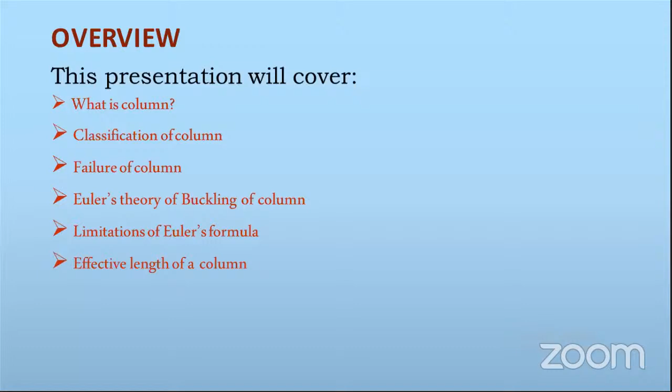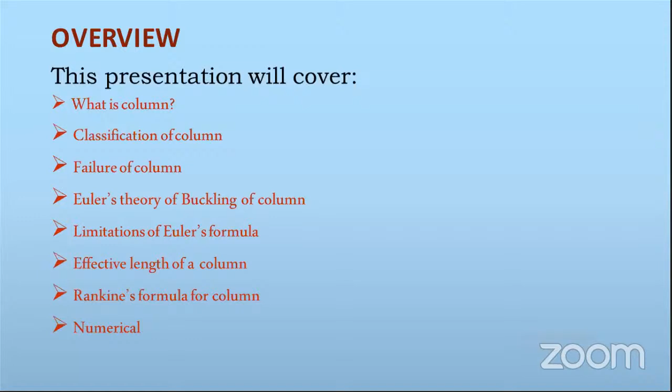Next, limitations of Euler's formula - whatever formula is given by Euler, there are a few limitations that we will discuss. Next, effective length of column, that means end conditions of column are to be studied properly before studying any type of formula. Next, Rankine's formula - after covering the limitations of Euler's formula, we will discuss Rankine's formula for column. And lastly, we will cover one or two numericals for Euler's formula as well as Rankine's formula.

So let's start with the topic. Firstly, dear students, what do you mean by column? Many of you are familiar with this term. I think all of you are from civil engineering, so you are familiar with the word column. Column is nothing but a vertical member of your frame structure.

Basically, two types of structures are there: first, load bearing structure, second, frame structure. In case of frame structure, we construct columns. Column is a truly vertical member which will take load from the slab and transfer that load to the foundation or subsoil. That is the work of column.

Now, with respect to column, we have two different terms: first is column and second is strut. Column is a truly vertical member which takes load, but strut can be inclined as well as vertical. Basically, the word strut is applicable in case of truss - that is the most suitable word you should use.

So in short, you can remember column is a vertical member of frame structure which has the function of transmitting load from the slab to the foundation.

Now an important term to be discussed under this is slenderness ratio. Why discuss this slenderness ratio term? Because slenderness, as the name suggests, is the term related to the size and shape of column. If your column is slender, according to IS 800 2007, basically 4 classifications are there: slender, compact, semi-compact, and plastic. But as per IS 800 2007, as well as practicability, slender sections are always neglected.

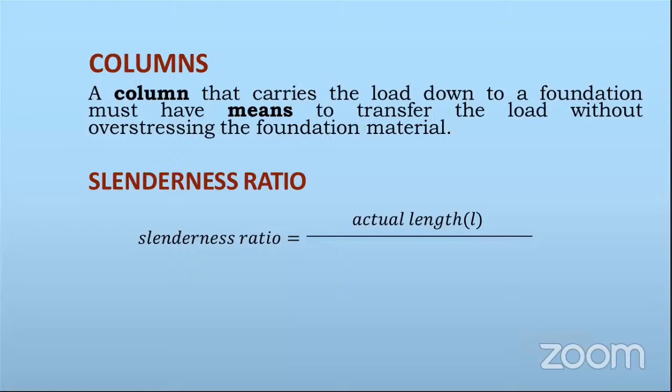It is denoted by lambda. It is a ratio of actual length of column to the least radius of gyration. Now, actual length of column - what is that? It is nothing but the distance from your slab to the other floor present at floor level. That is your actual length of column. In other words, you can call it height of column as well.

Second, least radius of gyration. What is radius of gyration? It is nothing but the distance of your point of application with respect to the axis of rotation. We will discuss radius of gyration in detail in the next few slides. So from these two slides, you have to remember what is column and what is the importance of slenderness ratio - it is lambda, that is L upon least radius of gyration.

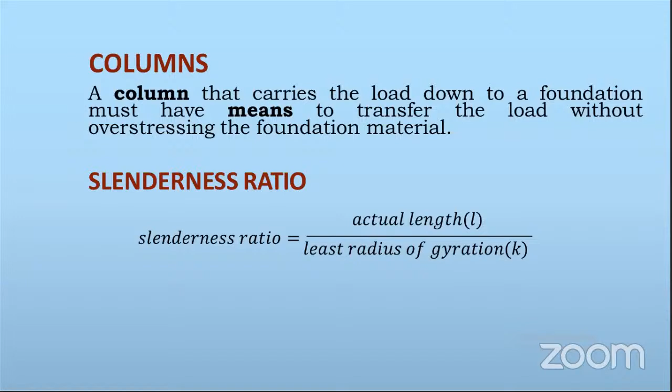Now, column - in this image you can observe a frame structure, and whatever is highlighted in red shade, that is your column. Column is nothing but a member which takes load from the slab and transmits that load ultimately to the footing. That is called column.

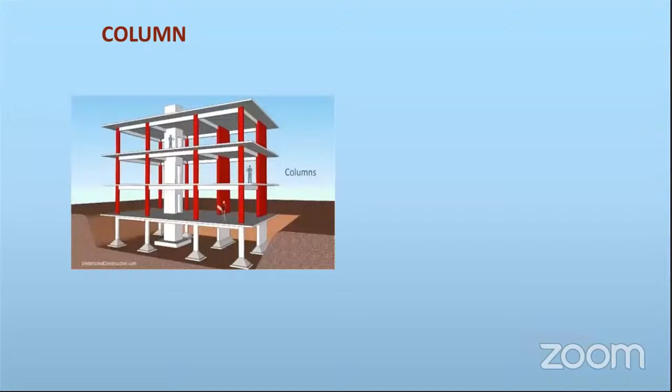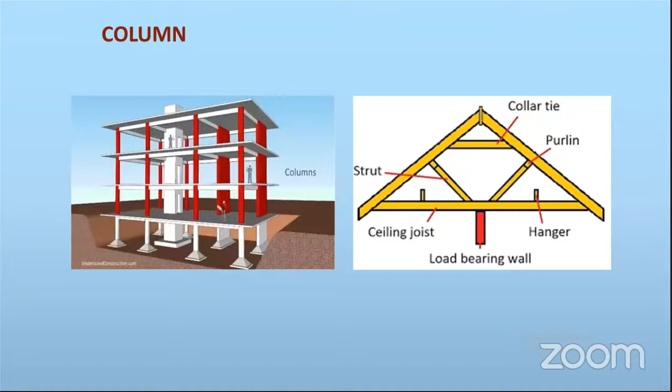Secondly, strut. Column is always a truly vertical member - only vertical members are called columns. What type of load does a column carry? That is axial compression load. But in case of strut, it is again a member under compression, but it can be inclined as well. So in the second image, you can observe strut is an inclined member shown in a truss. That is another classification under axial compression member.

Now, how to classify these columns? Basically, we discussed what is slenderness ratio - it is nothing but actual length with respect to least radius of gyration. Now, if your slenderness ratio is less than 32, that type of column is called short column. Do remember, this term is important whenever you study regarding Euler's theory as well as Rankine's theory. Second one is medium column.

If your slenderness ratio value is in between 33 to 120, it is called medium column. And third one is long column, where the slenderness ratio value is more than 120. So this is the classification of column based on slenderness ratio. Now, slenderness ratio depends on two basic parameters: first is length of column, and second is radius of gyration.

Now, in the diagram or image, you can see the first one is tall column, which gets failed because of buckling. While the second one is short column, which gets failed and has attraction towards more horizontal force. So in the diagram, you can see short column as well as long column. In short, you can remember long columns have their length dimension more as compared to cross-sectional dimension. That is your long column.

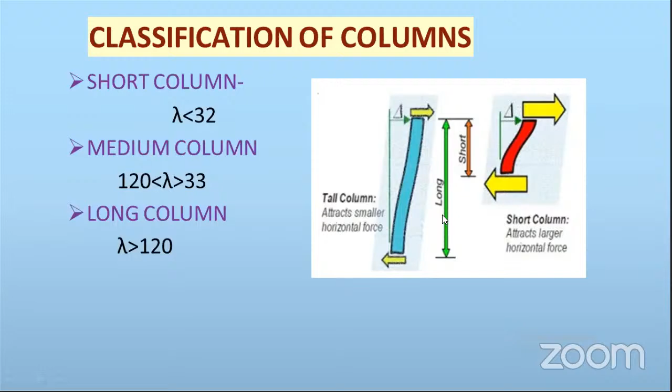Now, how is a column going to get failed? Basically, column failure is the most important criteria before studying anything regarding column. How is it going to fail? Any design with respect to civil engineering is concerned with firstly checking out its failure, and to avoid that failure, we have provisions. Now, to study Euler's theory as well as Rankine's theory, firstly we have to discuss failures of column. What are the failures of column?

First one is direct compressive stress. Second one is buckling stress. And third one is combined direct compressive and buckling stress. That means because of these three stresses, three types of failure occur. First, direct compressive stress - that means in case of short column, it gets failed directly. How does it fail? For that, I will show you an image or GIF where you will come to know regarding compression failure. Imagine any short column is there and load is applied continuously - because of gradually applied load, it will get crushed.

That is nothing but failure due to direct compressive stress. Second, buckling stress. In this case, your length dimension is more compared to the other two dimensions. Because of loading, there is a possibility that the length dimension is going to change its position from its original axis, and therefore buckling is possible because of buckling stresses.

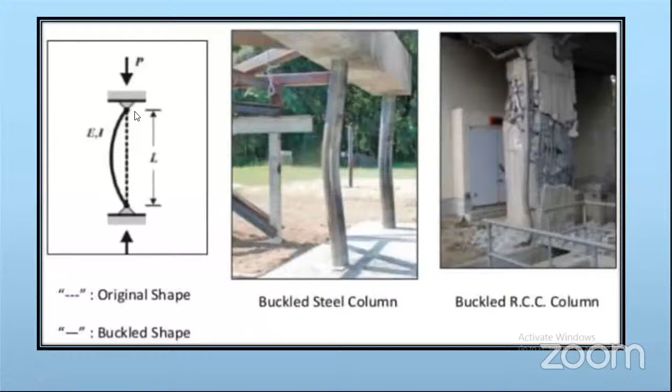Now, failure of short column - how is this short column going to fail? For example, everyone knows what stress is. Stress is nothing but force per unit area. Many times we humans are under stress, that means load is more - as per our capacity, load is getting more, ultimately it is having stress.

So in case of material, stress is nothing but load per unit cross-sectional area. If your cross-sectional area is not capable of taking that load, at that time failure will occur, and that is nothing but failure due to crushing or compression. So sigma, or small p, is equal to P upon A, where P is the load applied on the column and A is the cross-sectional area. So you will get sigma equals P upon A.

Now next, sigma is again to be defined in terms of PC upon A, where PC is crushing load, sigma C is crushing stress, and A is area of cross-section. So in case of short column, there is a lot of chance where your failure is due to crushing.

So sigma C is equal to PC upon A is the important term to remember in case of studying short column. Now, first type of theory that we are going to study is Euler's theory. Euler derived one of the empirical formulas for buckling of column. Euler considered different assumptions, and because of these assumptions, he derived this empirical formula. So before going for the formula, it is necessary to study the assumptions.

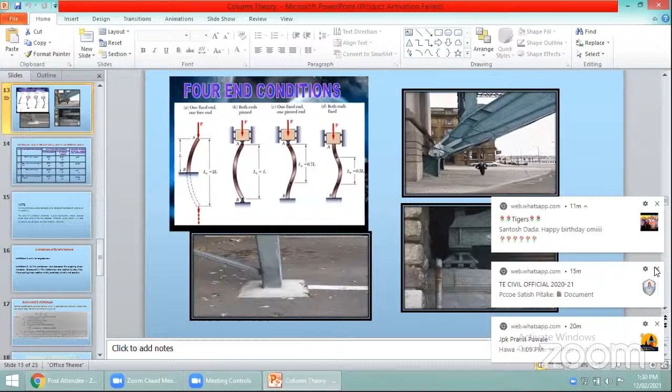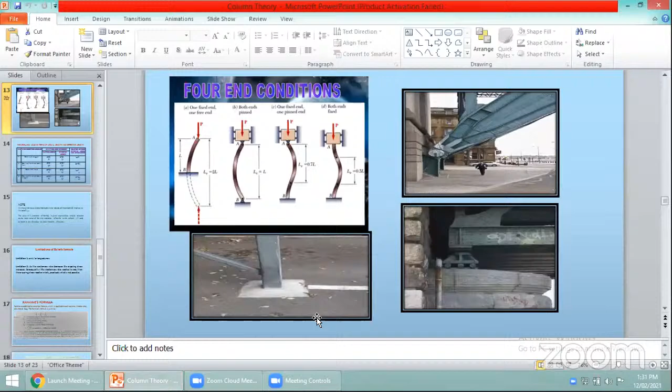Your screen is stopped, please reshare your screen, sir. Madam, please allow me to share my screen. Yes, done now sir. Sorry for the interruption, it might be because of a network issue or something; it was disconnected. So we will start again from the last slide.

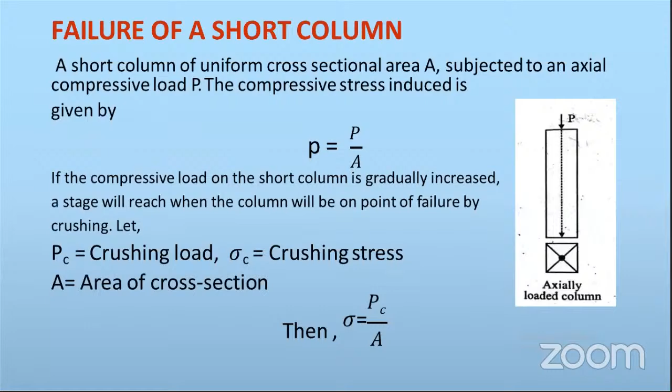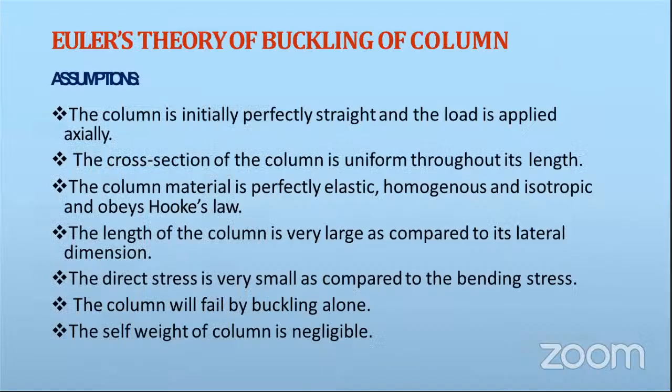So till now we considered these failure modes, these images we have covered, and Euler's assumptions we were discussing. Effective length we discussed, and before that, effective length we have already discussed.

According to the different end conditions, your length is going to get varied. Now that length is to be considered whenever we have to consider the slenderness ratio. According to Euler's formula, crippling load is there for any type of end condition.

It is nothing but pi square EI upon L effective square, where pi is a constant whose value is 3.14 or 22 by 7. E is Young's modulus, or modulus of elasticity. For example, for steel it is 2 into 10 raised to 5 megapascals or 200 GPa. That value is given. I is moment of inertia.

This moment of inertia value is either given or we have to calculate it. In case of a rectangular beam, moment of inertia is BD cube by 12. For a circular section, it is pi by 64 into d raised to 4. In case of numerical problems, we will see that.

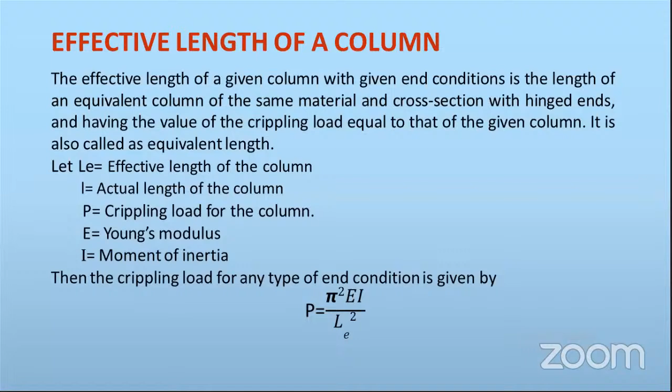Next one is L effective square, that is the effective length of the column. For example, if a column with 5-meter length is given and end conditions are mentioned, we have to go for calculation of effective length.

So next, this is your hinge support, an example for hinge support. Here you can see roller support, and here you can see fixed support. These are the 4 end conditions that we are going to discuss.

In the first case, one end is fixed and the other end is truly free. For example, you can say lighting poles which are there on the roadside. That is an example for one end fixed, where effective length is to be considered as 2L. You can see this buckle shape. L is the original length of the column, and the buckled length L effective is equal to 2L.

Now, second condition, where both ends are pinned, meaning hinge is provided at both ends. At that time, L effective is to be considered as the original length of the column; L effective is equal to L.

Now, third condition, when one end is fixed and the other end is hinged.

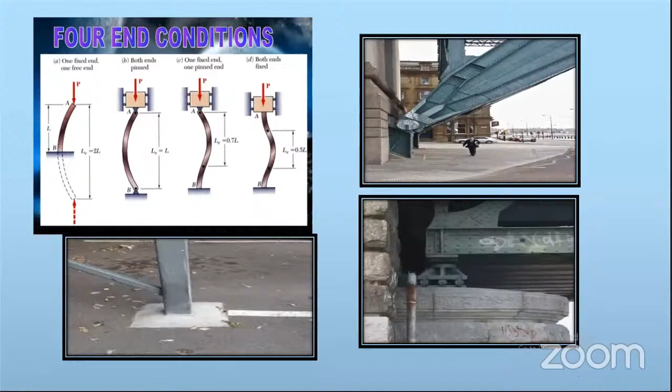That is the both-end-fixed condition where L effective is equal to 0.5 L, that is L by 2. So these are the four end conditions, and I have already shown you different types of supports. Euler's formula is going to be modified according to these effective lengths.

We already discussed Euler's formula: it is pi square EI upon L effective square. So when both ends are hinged, L effective is equal to L, and pi square EI upon L square is the formula applicable when both ends are hinged.

Second, when one end is fixed and other end is free, or you may call it cantilevered, effective length is equal to 2 times the length of the column, that is LE is equal to 2L. Third condition, when both ends are fixed, LE is equal to L by 2, effective length is half the length. So by putting that, your modified formula is 4 pi square EI upon L square.

So this is Euler's formula when both ends are fixed: 4 pi square EI upon L square. When one end is fixed and other is free, Euler's formula is pi square EI upon 4L square.

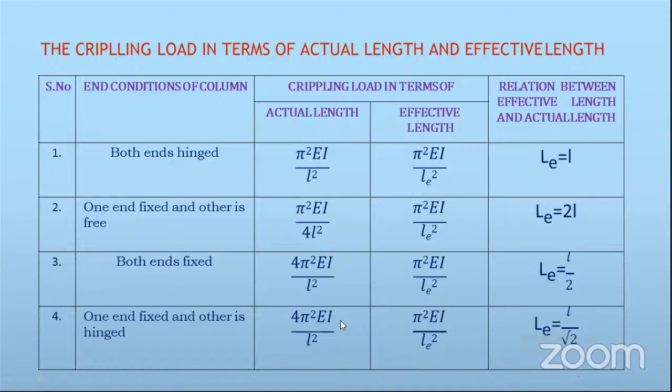Now the last condition, when one end is fixed and other end is hinged, LE is equal to L upon root 2, that means 0.707 L. By putting that value, your formula becomes 4 pi square EI upon L square. So those were the different conditions and different modified formulas for Euler's formula.

Now whatever I is there in the numerical or in the formula pi square EI upon L effective square, that I is to be considered for both cases. For example, if you consider Ixx and Iyy, that is moment of inertia along the x-axis and along the y-axis, for numerical cases we have to consider the minimum moment of inertia in Euler's formula.

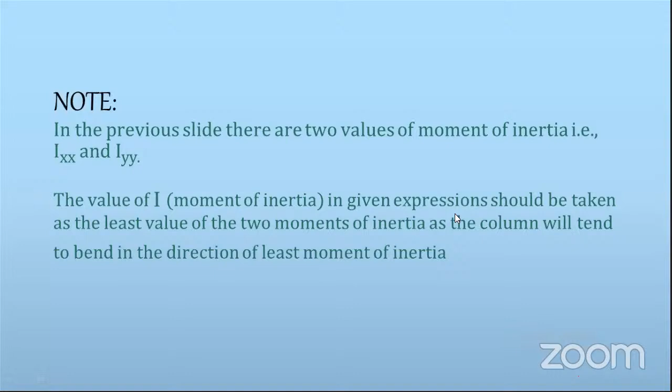Now we will discuss different... just one second.

Limitations of Euler's formula. As I already said in the assumptions, Euler's formula is applicable only for long columns. That is one limitation. It is not applicable for short columns or medium columns. There is no possibility that you will always get a long column only; there are chances you will get short or medium columns too, so here Euler's formula fails because it is not used for short as well as medium columns.

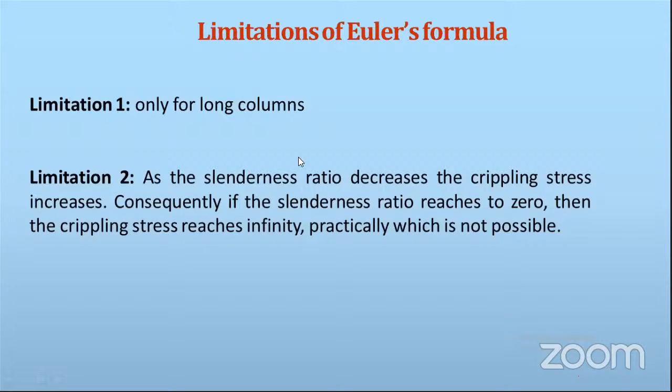So according to Euler's formula, if slenderness ratio decreases, crippling stress increases, and if slenderness ratio reaches 0, crippling stress reaches infinity, which is practically impossible. It is not possible to have maximum crippling stress and minimum slenderness ratio. So here again Euler's formula fails.

Now the next formula that is needed is Rankine's formula. As we discussed, Euler's formula is applicable only for long columns, but it is not applicable for short or medium columns. So Rankine derived a formula applicable for short columns as well as long columns. While Euler's formula was based on buckling only, Rankine's formula is applicable for both types of failure: crushing and buckling.

So the formula by Rankine is 1 upon P is equal to 1 upon PC plus 1 upon PE. Now what is P? It is the crippling load by Rankine's formula, the value to be calculated. PC is the crushing load. We already discussed sigma C is equal to PC upon A, so PC is equal to sigma C into A.

What is sigma C? It is ultimate crushing stress. What is A? Area of cross section. What is PE? Crippling load by Euler's formula. So again here it is a combination of crushing load and Euler's formula, meaning both types of failure are considered, crushing as well as buckling, given by pi square EI upon L effective square. So this is the formula.

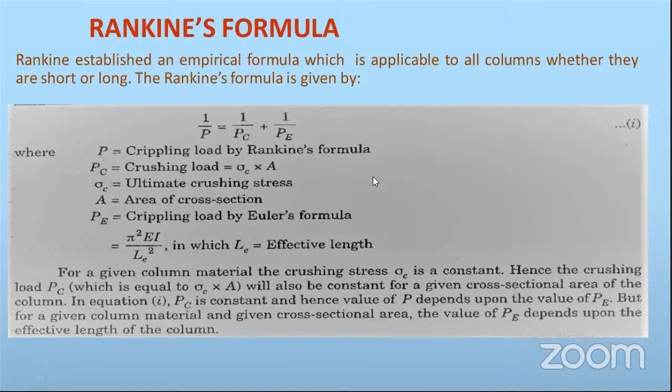1 upon P is equal to 1 upon PC plus 1 upon PE, developed by Rankine for failure. Ultimately, after solving by putting PC equal to sigma C into A, and PE equal to pi square EI upon L effective square, you get this derivation. That means P equals sigma C into A upon 1 plus sigma C into A upon pi square EI upon L effective square. By putting moment of inertia equal to area of cross section into radius of gyration square, that is I equals A into K square, you get another equation, and ultimately the modified formula is P equals sigma C into A upon 1 plus alpha into LE upon K bracket square, where sigma C is crushing stress, A is area of cross section, alpha is Rankine's constant, LE is effective length, and K is least radius of gyration.

Now, according to the material, these alpha values vary. For example, in one table I have shown, you get 4 values for 4 different materials. Alpha for wrought iron is 1 upon 9000. For cast iron, it is 1 upon 1600. For mild steel, it is 1 upon 7500. And for timber, it is 1 upon 750.

Okay, so that is nothing but Rankine's formula. In short, I will tell you again: what is Euler's formula? It is applicable for long columns, with formula pi square EI upon L effective square. The second one is Rankine, who considered both types of failure, first crushing, second buckling. His derived formula is sigma C into A upon 1 plus alpha into L effective upon K bracket square. So only here a new term is introduced, Rankine's constant, which is generally given in the numerical and depends on material properties.

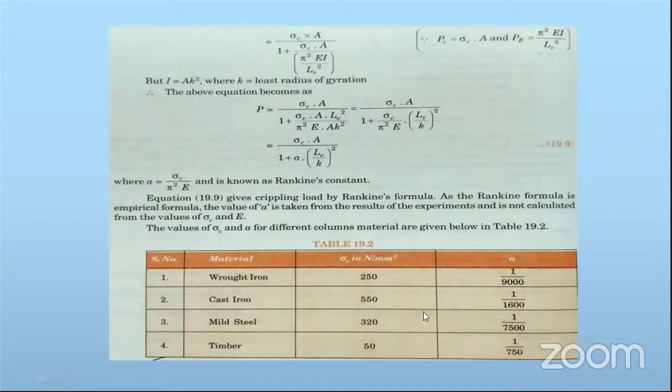So first numerical we will discuss. If you have your calculator and notebook, you can note it down, or else I am going to share this PPT with you at the end of the presentation so that you will be familiar with this as well. So here is the first numerical.

First one: a solid round bar, 3 meters long, meaning length of solid round bar, round meaning circular bar is there. Length is 3 meters and 5 centimeters in diameter, its diameter is again given as 5 centimeters. It is used as a strut with both ends hinged. Fixity condition is given so that it will be easy for us to calculate L effective. Now what is asked? Determine the crippling load. Take E equal to 2 into 10 raised to 5 Newton per mm square. So how to identify whether it is based on Euler or Rankine? In case of Rankine, material property alpha is always given. In case of Euler, you will be given E, L, diameter, etc., and fixity condition. So in this case, we have to use Euler's formula.

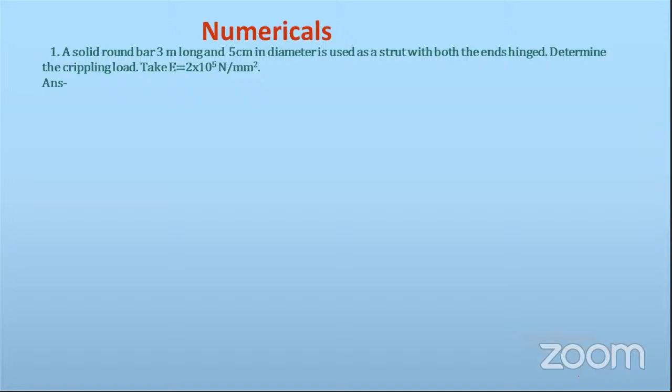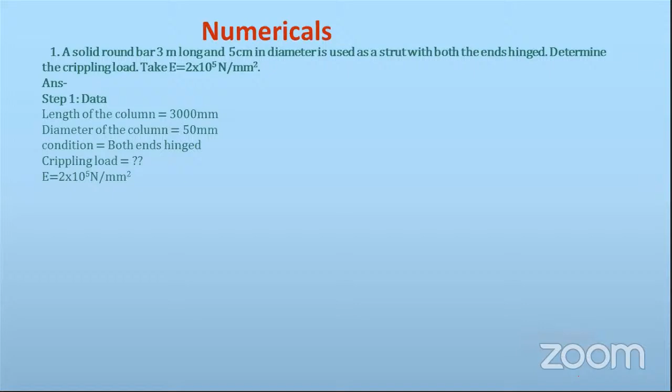So what is the given data? Here is the given data: length of column is equal to 3000 millimeter, diameter of column is equal to 50 millimeter, condition is both ends hinged, crippling load is to be calculated, and E is given as 2 into 10 raised to 5 Newton per mm square. So which formula is to be used?

Pi square EI upon L effective square. So one by one we will determine each term. First, calculation of moment of inertia, that is the I value is to be calculated. As I have already told you, in the numerical it is given as a circular bar, that means moment of inertia has formula pi by 64 into d raised to 4. Pi into diameter is given, diameter is 50 mm. All dimensions are to be taken either in millimeters, centimeters, or meters, so d is 50 mm. Putting that value in this formula, you get I as 0.306 into 10 raised to 6 mm raised to 4. If possible, any student can check it out.

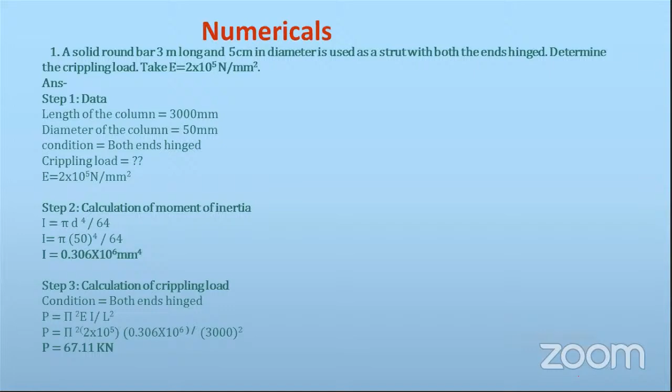Next step, calculation of crippling load, using the direct formula pi square EI upon L effective square. Now for L effective, what condition is given? Both ends hinged. As already discussed, if both ends are hinged, L effective is equal to L directly, so the formula is not modified. Therefore, P equals pi square EI upon L effective square, which equals pi square EI upon L square directly, since L effective equals L. Pi square into E is given as 2 into 10 raised to 5, into I which we calculated using pi by 64 into d raised to 4, and lastly L is again given as 3 meters, converted into millimeters as 3000, squared. You get crippling load as 67.11 kilonewtons. So does anyone have any doubt in this numerical?

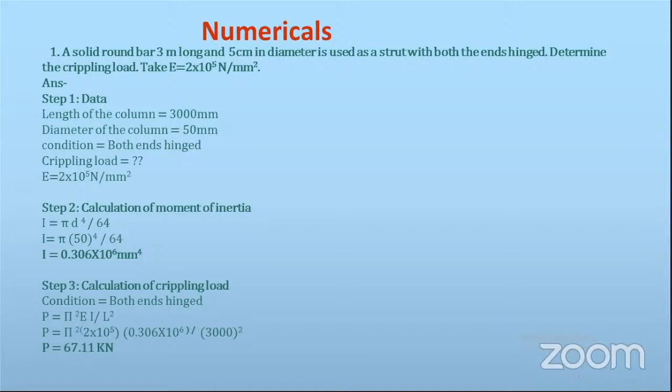Any doubt? Yes. Okay, so this is the simple numerical which is asked generally in SPPU regarding calculation of crippling load by using Euler's formula. Okay, now next numerical.

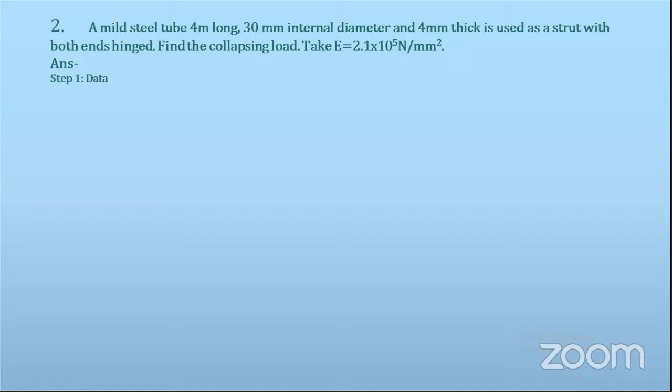A mild steel tube 4 meter long, 30 internal diameter and 4 thickness is used as a strut with both ends hinged. Again, L effective condition is same as that of last numerical. Find collapsing load where E is to be taken as 2.1 into 10 raised to 5 Newton per mm square. Now length of steel tube is given, diameter is given, thickness is given, fixity condition is given, crippling load or collapsing load is to be calculated, and modulus of elasticity or Young's modulus is also given, that is 2.1 into 10 raised to 5 Newton per mm square.

So dear students, what is the given data? That I have written, so all the values I have converted in terms of millimeters. So L is 4000 mm, D is 30 mm, thickness is 4 mm, condition is both ends hinged, E is given. Now calculation of external diameter is required because internal diameter is given as 30 mm, thickness is given, so we have to calculate external diameter.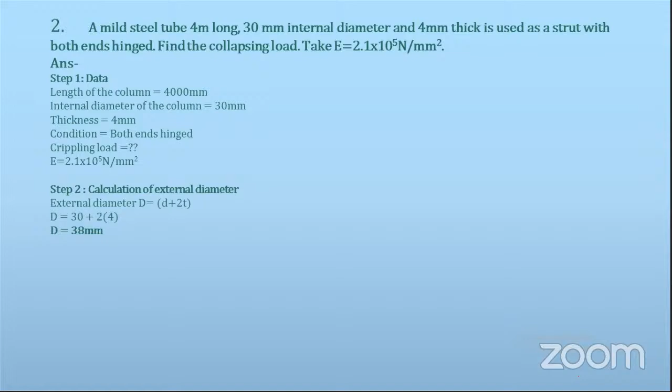Now whenever you are going to consider any pipe, it is having thickness throughout its periphery, so while calculation of external diameter, 2 times thickness is to be added. So capital D is equal to small d plus 2 into T. So by putting value 30 plus 2 into 4, your external diameter comes to be equal to 38 mm. So it is a type of hollow pipe, you can say, or 2 diameters are there.

So moment of inertia, it is again same as that of last, pi by 64 into d raised to 4, but here 2 diameters are there, external diameter and internal diameter. So pi by 64 into 38 raised to 4 minus 30 raised to 4. So by putting this value in your calculator, you will get the value as 0.0625 into 10 raised to 6 mm raised to 4. So we have calculated I.

So by using crippling load formula directly, what is the crippling load formula? According to Euler's, it is pi square EI upon L effective square. Now your L effective is equal to L as both ends are hinged. So by putting value pi square, it is either 3.14 square, or directly you can put the value as pi from your calculator. Then E, 2.1 into 10 raised to 5, which is given. Then I we have calculated.

In this numerical, I is calculated by using another formula because 2 diameters are there, but in last numerical, only a single solid bar was there. Here a tube is there with internal and external diameter. And lastly, L effective, which is nothing but L, 4000. So by putting this value, you will get crippling load P equal to 8.096 kilonewtons.

So this was the second numerical with respect to Euler's theory. I think here I will stop my presentation. So basically it was with respect to Euler's theory numericals as well as theoretical part, regarding Euler's and Rankine theory. If you guys are having any questions, kindly open your mic and you can ask.

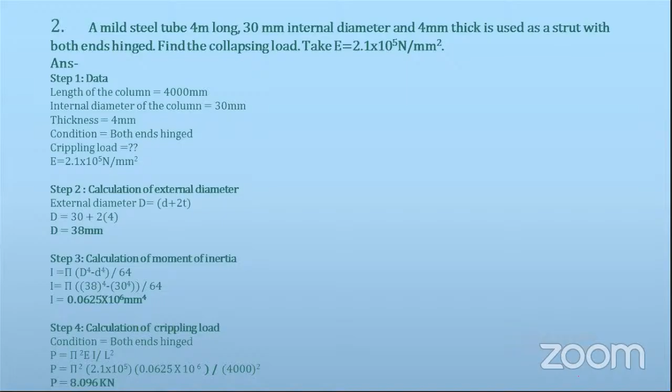Yes, ma'am. I think, sir, there is no question. Sir, is the sound coming through, sir? Yes, ma'am. So I think there is no question, so we conclude the session, sir.